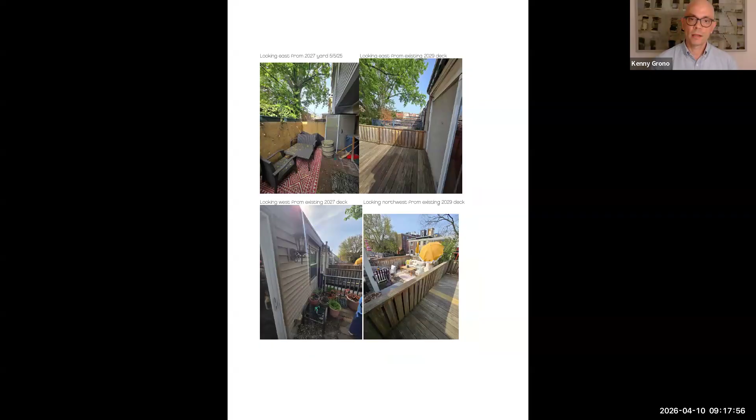I think that's it, I'm happy to take any questions. Thank you very much—are there any questions from commissioners at this time?

Yeah, actually I have a few. Did you look into historic maps analysis for these properties? So I did review some historic maps.

I saw on there that on this block, the rear L's are original to the home, so before these alterations that I spoke of, those L's were there. That's all I really got out of the maps.

Because the way you're describing it really lacks precision, it would be important to have evidence about what was there at what point. For example, if you look at 19th century maps, you can see the materiality and number of stories of these rear L's, stretching into the 20th century. Sanborn maps would have given you this information, and historic aerial photographs might tell you when these changes took place, so we could understand their historicity or lack thereof. Photographs documenting the conditions you're describing would also be extremely helpful, rather than a narrative not keyed clearly to the photographs you've presented. So I personally feel I don't have enough information to really understand what you're describing without real documentation.

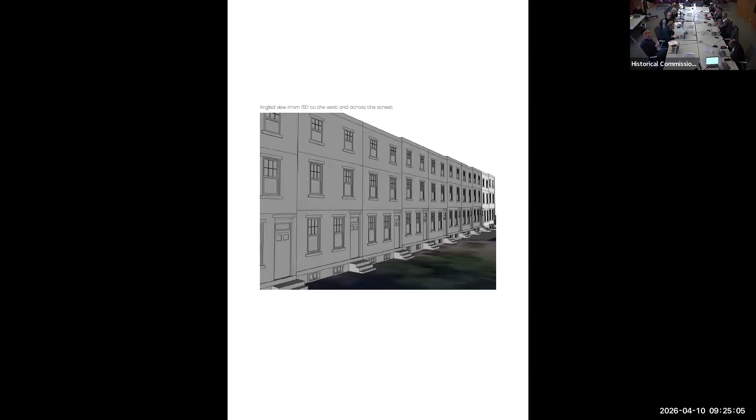I have one more comment about the revised plan. It looks to me as if you're proposing a segmental arch fanlight over the doors, which is not present in the existing historic condition, as it looks from the photographs and looking down the rest of the block. So that would not meet the standards — it would create a false historical element.

I'd like to respond to Dan's points as well, but real quickly, I'm not sure what fanlight you're referring to — we're not making any changes to the front facades along those lines. Well, then the drawing I'm looking at is... Could you direct me on the drawing? I apologize, it's my mistake.

I do apologize. I'd love to respond to a couple of Dan McCoubrey's points.

In terms of the extent of demolition, I agree with the extent of demolition to the rear L's, as well as the rear wall. That's why I was trying to indicate that the rear wall has already been demolished in 2024 and rebuilt with frame, in terms of the reversibility of that. In terms of the extent of demolition in the main part of the house, we share the concern, perhaps not as much from a historic standpoint, but from a structural standpoint.

We want to retain the front facades and we want to retain them in good condition. Our design did attempt to maintain as much of the central party wall as possible, and use selective areas where we open that, because that will be the best thing we can have in place during construction to maintain that front facade.

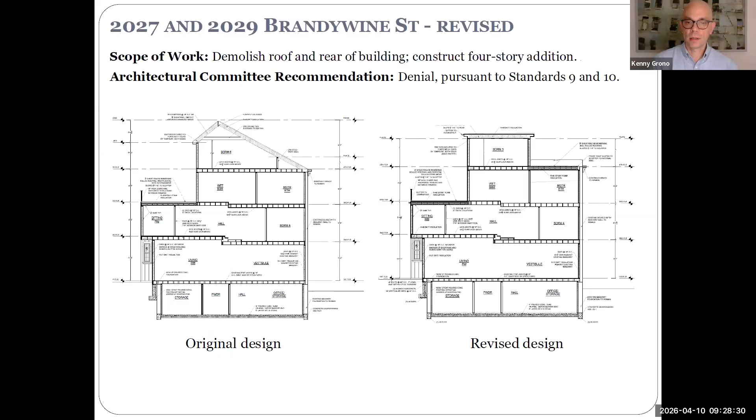I see, yes. So what we put together is what was required by zoning. We have received zoning for this project, and the lot consolidation is complete. I believe the address may now be 2027 for both. No, I understand about zoning requirements. As far as the context of where they sit, it's approximately in the middle of the block.

Yeah, could you take the phone outside, please? Thank you. Yeah, or go around the wall. Thank you.

Okay, I'm sorry, I couldn't hear you. Could you repeat that, please? In terms of its siting within the block, it's approximately in the middle of the block. Okay, no, because that helps in understanding. Obviously I would feel differently if it were at the very end of the block.

All right, what is the address of the last house on the block? Is it 20... It's 2063. Okay, so it's that far, and the first house I assume is 2001. Yes. I used to live a half a block away from this for 5 years, so I know the block. I just want to know where it is.

This is a difficult situation for me. I probably walked up and down this street and continue to use it probably several thousand times over the last 50 years, so literally, I certainly have a feeling for the street. I've thought about it. I don't know what the back of this property looks like. It's really barely, hardly visible. Mount Vernon, which is to the north, is 3-story buildings of a taller scale.

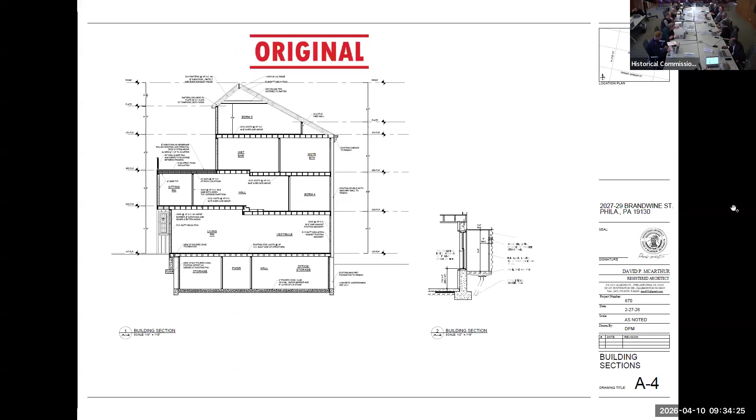So, speaking as someone who is not an architect but who can read plans, a full set of existing conditions would really help, showing proposed demo rather than just proposed new construction. That goes along with the question of the Ls. I understand from your perspective that they're not historic, but it would really help to have documentation of what the actual conditions are, what the materials are. If you can't provide detailed information about when the materials of the Ls were put in place, at least we could have a better means of judging for ourselves.

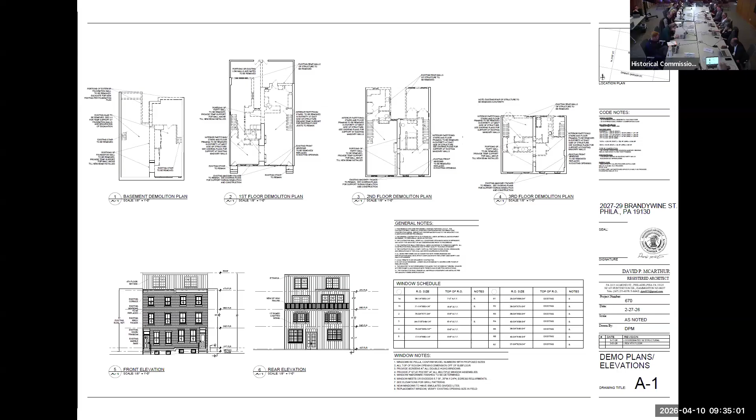So if I could speak to a couple points. I think there may be a misunderstanding in terms of the rear. Part of the reason we put the fourth floor where we did was to set it back enough from the front that we would not have visibility from Brandywine Street. But along the rear, whoever said there is a very consistent rear elevation, I agree with that. There are decks along there, and we tried to maintain a lot of that and have our deck match up with the others so we weren't affecting light and air. We do have an extension of the primary bedroom where it comes past that, but along 2029 we maintain that rear line.

In terms of the extent of demolition within the main block, it certainly would be possible with our plan. We're not changing floor heights. We have a jog between the two houses, and we're maintaining that along the front. So it would be possible to maintain those floor joists with this plan—it just doesn't seem like the best plan to us from a constructability standpoint.

And then in terms of materials and the extent of demolition, the page currently up is our demo plan that shows in dotted lines where walls are being removed. You can see on 2A1, the first floor demolition plan, that section along 2027 where the house is full width, so it's no longer an L. I have photos further down from underneath of that frame construction. We attempted to peel back some of the siding to figure out what was underneath, but we were going to end up exposing the house to weather. So instead, we went inside and took photographs of the windows at both houses to show the different wall depth, and show that that's a 2x4 wall at 2029.

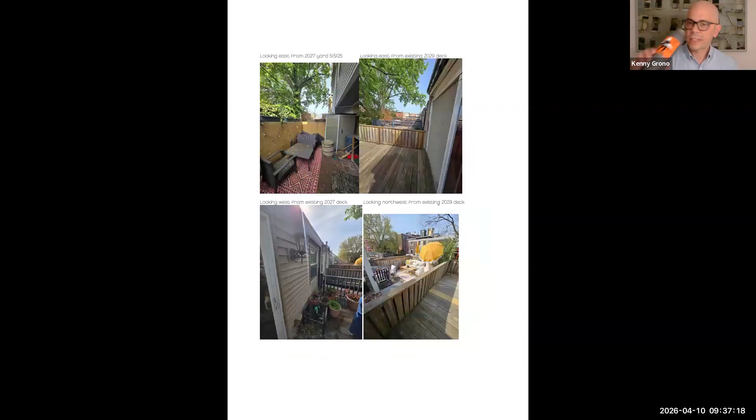It's also true that the way these are laid out, we have party walls on either side. In terms of other conditions, the chimneys happen to be grouped between my properties, so we do not have any adjoining chimneys above. Perhaps that's helpful.

Go ahead, Bob. Yeah, I just took a look at the aerial photos, oblique aerials for this block, and there are 9 decks, but with one exception, they're all in the rear L. So you have the 2-story rear L, and there's a deck on top of that. One home has a deck there. They also have a deck on the back portion of the main block, but there's no structure, just a deck floor. Now that may have changed since the photo was taken, but that's correct.

That's at the very beginning of the block, right around 20th. Yeah, there is a deck on top of the third floor. We don't know whether that was pre or post designation, so...

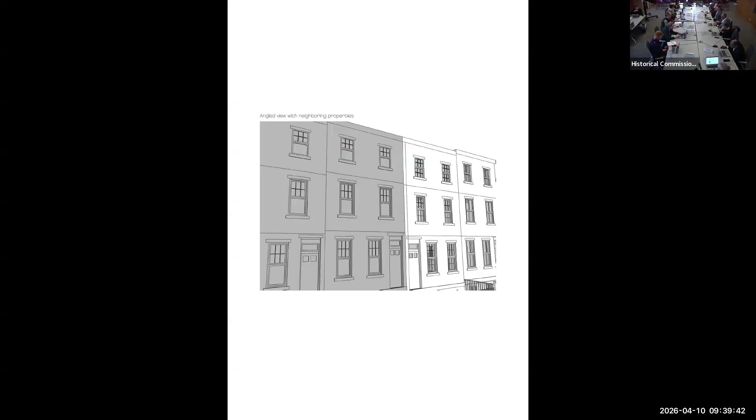Thanks, Dan. I mean, I would just sum up by saying, other than the question of demolition, which I think this would constitute, the primary objection, in my opinion, is the extension of a 4th floor on what's the equivalent of the main block of the house.

I think that the deck that's at the rear of the main block of 2003 or whatever it is, down at that end, that's completely invisible. It's not projecting above the existing roof. It doesn't change the structure of the roof. There's no demolition to do that. So that approach certainly would, I would vote to approve.

Any other comments from commissioners at this time? Bob, are you talking about something different from the 4th floor? I'm not talking about changing the existing roof at all. I'm talking about what's there at another home in the block at the rear of the main block, which is a roof deck built on top of the existing original roof.

Right, and it's to the back. It begins at the rear wall of the main block, and it looks like it extends up about 12 feet or so, on top of the main block. I'm not seeing it in the photograph.

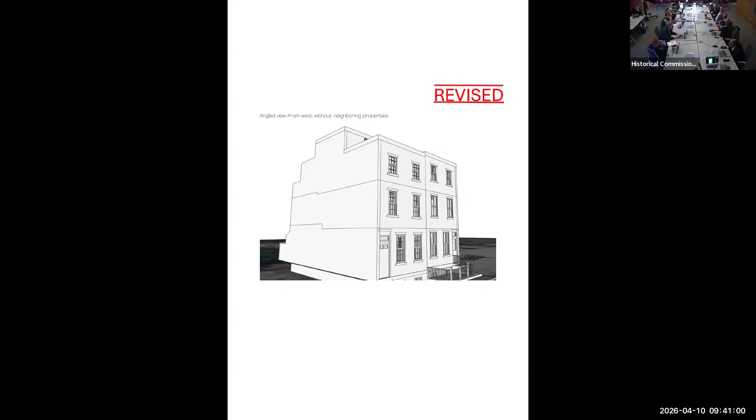Right, it's just out of sight in my photograph. I'm just looking for it in the rear photograph. Yeah, it's just out of sight. It's right at 20th Street. So it's visible from Brandywine, 20th, Green. That deck is visible from everywhere.

But I think just a tiny bit of it, so you can see the red deck. Yeah, right, it's a newer deck, probably from the last 10 years. That red deck, there then are steps up to another red deck. That's the house we're talking about. You just can't see the upper red deck. I was trying to find it on the photograph from the rear.

Anything else from commissioners? Should we open up to the public? Okay, go ahead.

Good morning. Thank you. Good morning. My name's Kathy Dowdell. I'm here as a member of the public, but I am also an architect. I have no connection to this project, nor to the contractors.

But I do want to emphasize the point that Commissioner McCoubrey made. The drawings that were submitted for your approval show removal of all of the floor framing on the second floor, all of the floor framing on the third floor, all of the roof framing, significant party wall demolition, most of the rear Ls. When I read Philadelphia's rules, it says more than 2/3 removal of framing and exterior walls constitutes complete demolition.

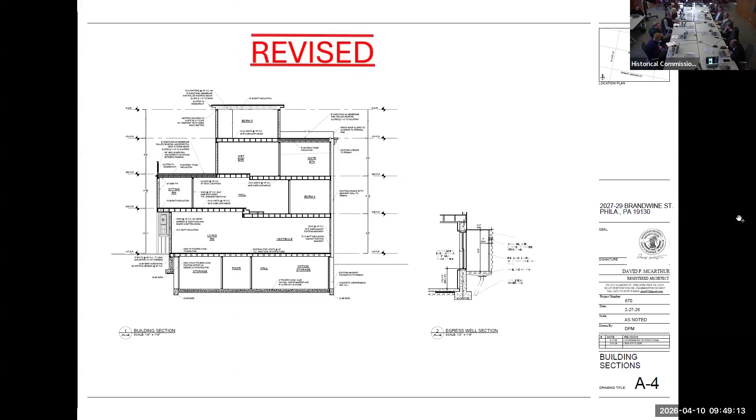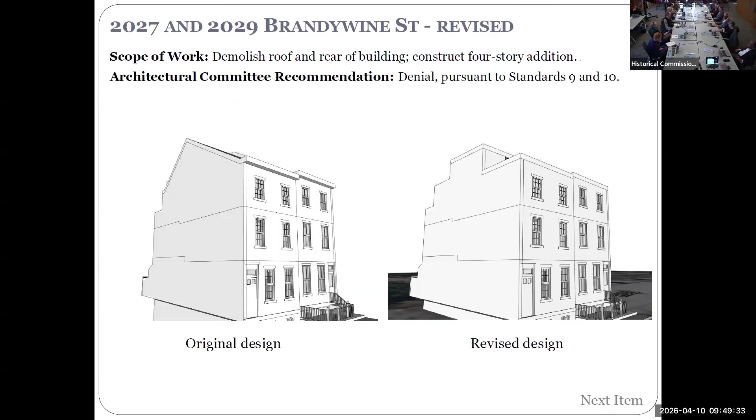Thank you. Thanks, Bob. Are there any other comments from commissioners at this time? Is there a motion? Dan McCoubrey, I will make a motion to deny alterations and additions at 2027 to 2029 Brandywine Street. Is there a second? Second. Are there any commissioners opposed at this time? Seeing no opposition, that motion is adopted by unanimous consent. Thank you, commissioners. Thank you very much, Kim. We'll move now on to, go ahead, Bob.

I think we should just put in the minutes that we encourage the applicant to come and meet with staff and go over the contents of what would be a complete package, so that we could understand not just the zoning, but also all the historic preservation aspects of the project. Sure, we'd like to work to a solution. Yeah, let that be noted in the minutes. We always encourage applicant participation.

Move on to our next order of business, which is 408 South 22nd Street. We'll turn over to Josh Schroeder from the Historical Commission staff to present. Good morning, Josh Schroeder with the staff. Before I read an overview, if either Michael Bucci, Angela Bucci, or Kate Woodson are attending online, if you could raise your hand to speak to the application. Thank you.

This revised application proposes to raise the front door at the row house at 408 South 22nd Street, add marble front steps and a handrail, and replace the existing double-leaf door with a single-leaf door with a panel layout resembling the existing door design. Existing crown molding and transom at the top of the door would remain. The existing door panel below would be removed. In response to the Architectural Committee's comments, the applicants have removed the originally proposed raised panel side lights in favor of a plainer beaded edge molding around the proposed new door. For some context, all 7 houses from 400 to 412 South 22nd Street were constructed simultaneously in about 1869. The existing entrances at 408 and 410 have fewer steps and lower doors than the adjacent houses, though the doorway heights are consistent across all 7.

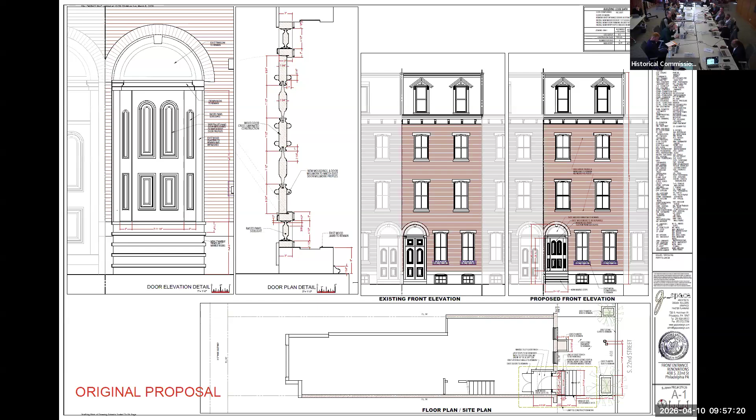I'm going to repeat myself to some extent, but this time I actually did find the photograph of the existing conditions, but it's buried and at a scale where you cannot accurately judge the condition of the door. It would be helpful to have some sense of whether there's been damage to the doors from break-ins. It's not visible on the photographs in the package. Maybe I'm being naive, but I would have thought that if there had been break-ins, there might actually have been damage to the doors. And if it's not damage to the doors, then perhaps it's the locks. I'm just asking these questions.

Well, she didn't elaborate on how they broke in, but the door does have quite a bit of wear on it. There's a lot of air leakage. I think it's warped a little bit too. So the existing doors probably do need replacement at this point in time.

It's just that you've got beautiful original doors which a good carpenter or workshop could fix up and splice presumably into a single door. I hear what you're saying, but the owner has objection to the double door, and a single door at that size is a really heavy door and just a little bit hard to maneuver when you walk around when you get inside there. You don't have a lot of width.

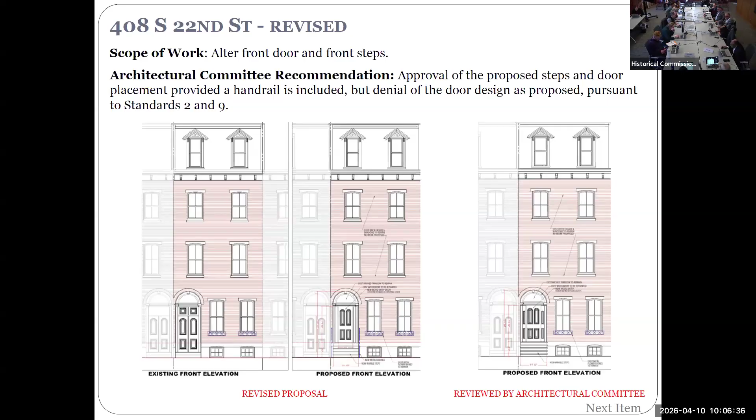It's a pair. Josh with the staff — I looked into the original deeds for when these rows were built, and they're described as three-story buildings with no mention of mansards on these two. But we don't have records of when a mansard may or may not have been added.

I'm not talking about the mansard, I'm talking about the actual height of the doorway. The mansard kind of goes with the lowering of the doors, so there was a renovation at some point — again this would be 18-whatever, but we don't know when. We need more detailed photographs of the conditions, because it's highly unlikely there would be a permit that relates to these.

Well, the marble step is like a three-quarter inch marble. It's not a question of dimension. But the condition of the marble steps is kind of shown in this front entrance photograph. Well, again, if you had a detailed photograph that was in focus, it would be very helpful — rather than just a general shot in which you really can't see the condition of any of the materials in any specific way.

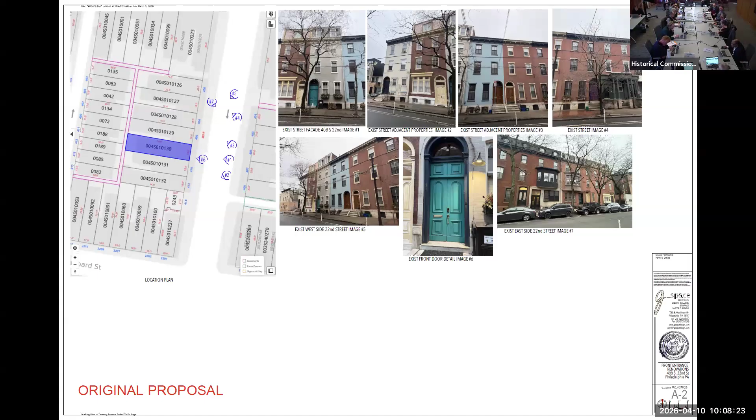Go ahead, Bob. Yeah, I would say that if this was unique on this block — the configuration of the door and the steps — and there had been changes, and somebody had documentation and wanted to take it back, we would probably agree to that. But where this is a pair, if you look at the drawings that were there, it reminds me of a bunch of kids where one's sitting up and one's sitting down — it just doesn't fit in.

And if these were altered at some time together, that's part of the history. That's an important point — I hadn't quite gotten there in terms of articulating it, but we're not talking about changes that happened in 1983, we're talking about historic changes. So clearly these are contributing in a sense. It could have even happened at the time they were built, that the people buying them made some changes — it's possible it goes back that far.

All right, I think we've offered some answers, several of us, to solving the problems that the owners may be concerned about, of security, et cetera. I agree, I would encourage whatever we have, that they work with staff and provide more information — we always encourage the applicants to work with staff. I think at this point we have enough information to take it to a roll call vote, and we should do that. Thank you.

Go ahead, John. Commissioner Holloman: can we hear the motion again? Sure, Dan, do you want to repeat the motion? My motion was for approval of the raising of the door and the installation of marble steps with a handrail, but denial of the new door that's reduced in width.

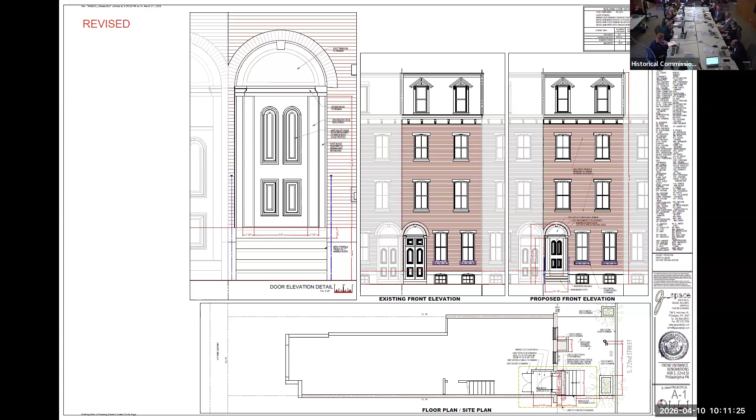Hearing no opposition, that motion is adopted by unanimous consent. Thank you very much, commissioners. Thank you to our applicant, and thank you to Josh from our staff.

Next, we'll move on to 4225 Pine Street. Thank you very much. We'll turn it over to Ted Mouse from the Historical Commission staff to present.

Good morning, everyone. I believe that several representatives of the applicants are on the call. If Ryan Crochetto and Andy Marsden can raise their hand in Zoom, please let them be elevated.

I'll read an overview. This application proposes legalizing the removal of slate roofing and its replacement with GAF Timberline Ultra High Definition asphalt fiberglass shingles in a charcoal color on the mansard at 4225 Pine Street. This property is part of a larger development row on the 4200 block of Pine Street, all of which historically featured slate mansard roofs. The properties on the block were listed on the Philadelphia Register of Historic Places in July 2024 as part of the Southeast Spruce Hill Historic District, meaning that any slate mansard replacement prior to written notice being sent to property owners was not reviewed by the Historical Commission.

In October and December 2025, and again in January 2026, a community member contacted the Department of Licenses and Inspections to inform it of the recent replacement of the slate with asphalt fiberglass shingles at this property. The Department of Licenses and Inspections issued a violation for the roofing work without a building permit in January 2026, prompting this request for legalization from the property owner.

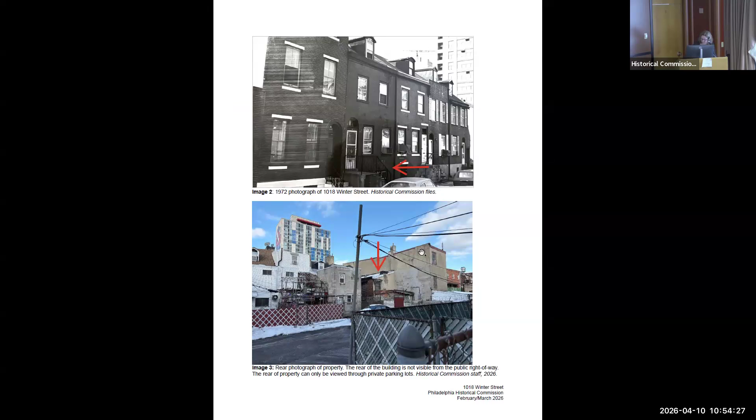Thank you. Great. Kim, are the applicants in the meeting? Yep, the applicant is here. Please elevate yourself. Okay, if you can please unmute to speak to the commissioners. Thank you.

Hi, I'm Harry Young. I'm the owner, family-owned property. And Sam Xu, I'm not sure if he's here. Sam Xu is the architect for this. We came last month in regard to providing the information that we forwarded to you. We also were requested to do a structural report, and we provided that. And right now, that's where we are.

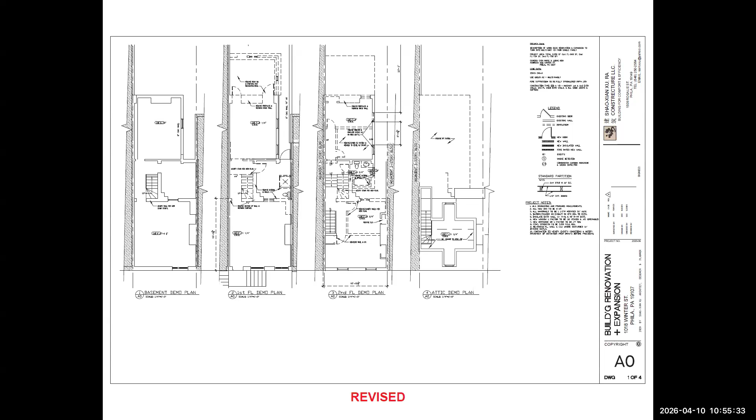Okay, thank you very much. Any questions from commissioners at this time? Dan McCoubrey, would start out by saying this is a great step in the right direction.

However, the drawings that have been provided at this point do not adequately show the configuration of the addition, and especially its relationship to the main block of the house. The section seems to show the rear wall of the main block there, but it seems to be largely demolished, but that is not clear. So I would suggest that this comes back to the Architectural Committee, as it's a kind of a fundamental change in the design, and that the documents be fleshed out to show elevations of the new rear wing. But in general, I think it's the correct direction.

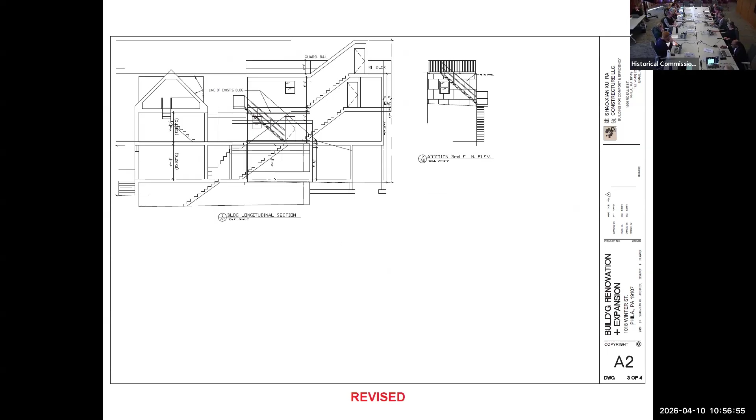Right, thank you. Any other comments from commissioners? Seeing no comments, are there any comments from the public? No hands are raised, and I just for the record point out that I don't see the architect Sam Xu in the meeting. He has not been present during the morning today as the meeting has progressed, but we did email him to notify him of the meeting and provide the meeting information.

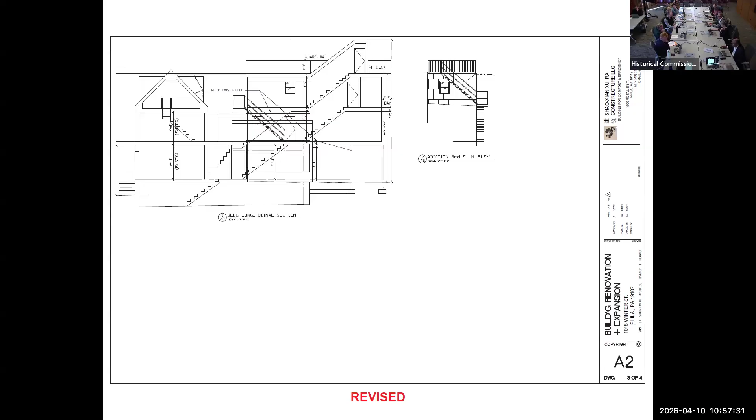Got it, thank you. Is there a motion? I will make a motion to deny the application as presented due to incompleteness and remand this back to the Architectural Committee. Thank you. I would urge the applicant to get in touch with the staff, work with the staff to develop the proper materials for presentation. Great, thank you.

Just before you vote on that, can I point out that you can either deny the application or remand it to the committee, but you can't do both? Oh, okay, then I will take the remanding route. Great. Is there a second? Second. Any commissioners opposed at this time? Okay, seeing no opposition, that motion is adopted by unanimous consent.